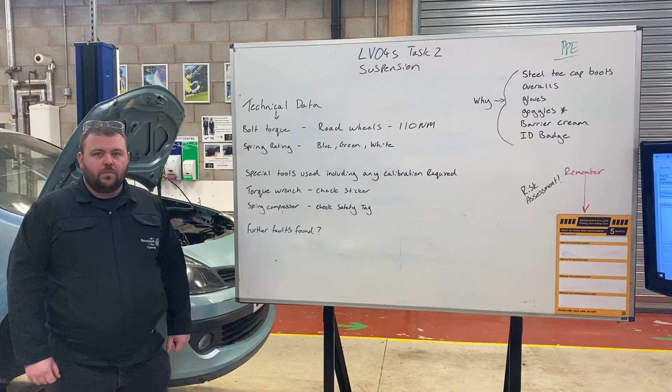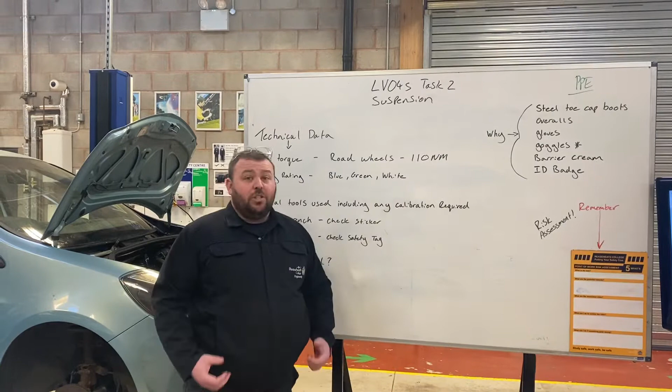So in this task, I'm going to be giving you a refresher and a reminder of the task we completed, which was LV04 task 2, your suspension task. This task is a dual task with two parts: we're going to remove and refit a suspension strut from a vehicle, and then remove and refit the suspension coil spring from the strut.

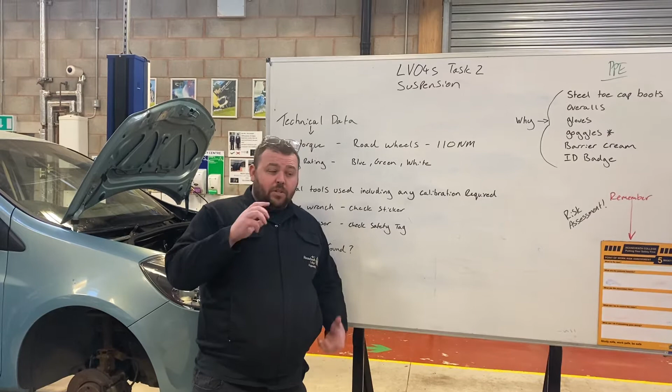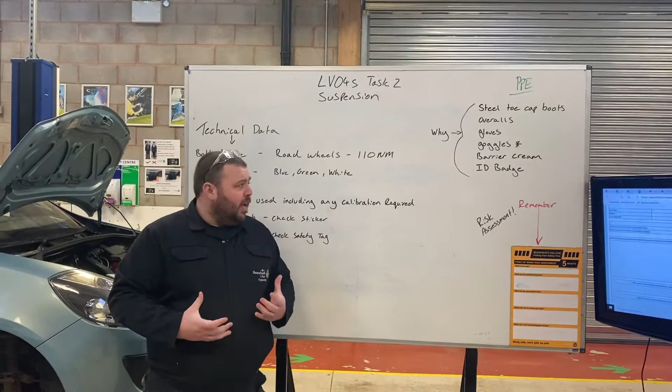So where do we start? Let's have a look at the board. As always, we start our practical lessons with a practical risk assessment. Normally we do that by completing our 5 whats board, but as I'm demonstrating this task, I'm going to be doing our risk assessment as we go through it.

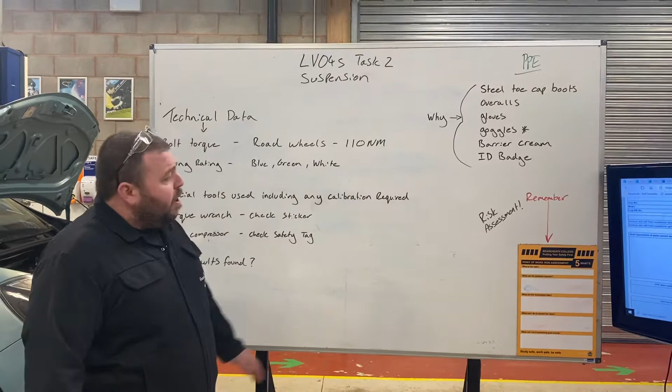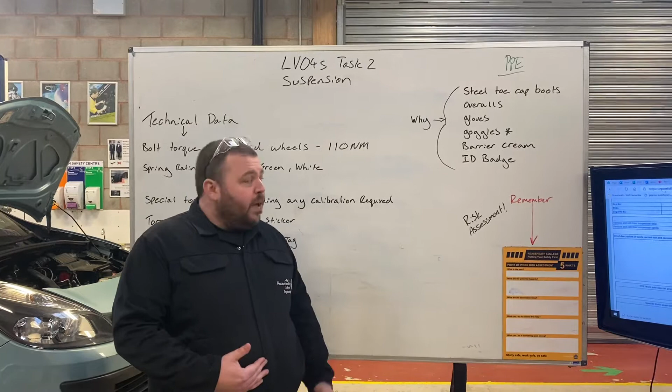After we do our risk assessments in the morning to make sure our environment is safe, we move on to our PPE list. We only wear PPE relevant to the task we're doing. In this particular task, I'm going to be wearing my steel toe cap boots, overalls, gloves, goggles, barrier cream, and an ID badge.

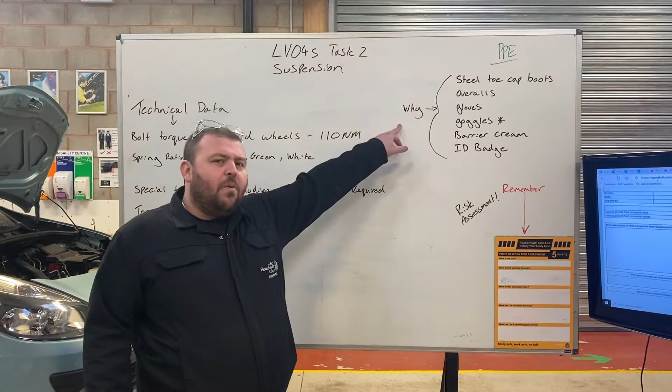I've put there why do I wear it, because on our task sheet it says PPE worn and special precautions taken. So there's a reason why I'm wearing this PPE, and I need you to tell me why it would be relevant to wear each part of it.

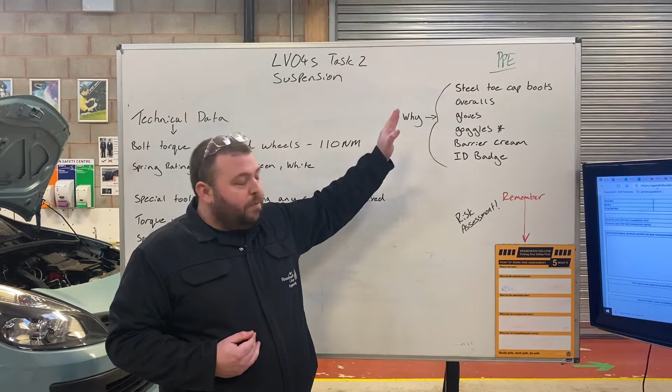Let's have a look then. Let's go over to the task sheet. If we go to our IMI ePortfolio task sheet, here we are - this is exactly how you see it. As always, we start off our task sheet with our vehicle information: registration number, approximate year, make, model, and VIN number.

We then move on to the customer request, which on this particular task, as I said, is a dual task: remove and refit a front suspension strut, remove and refit a suspension spring. Then we're going to complete a brief description of the work carried out.

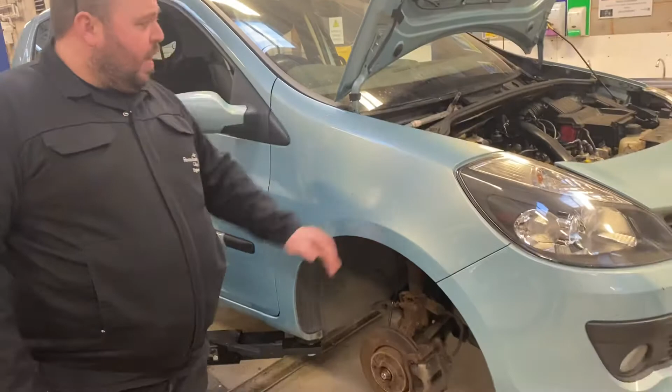Let's have a look now at the vehicle. The vehicle I've chosen for today is our Renault Clio in the workshop. The first part of the task is to remove the suspension strut.

In order to do that, we would always start our strip down at the bottom end of the vehicle. As you can see, for ease of time, I've already taken our wheel off, so let's have a look in our wheel arch. We've got multiple components here that we're going to have to remove.

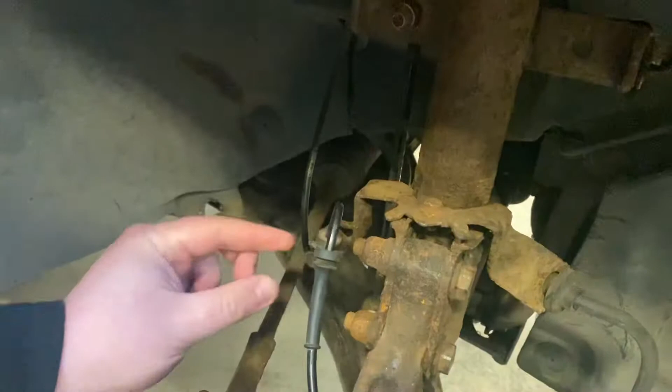I would start by disconnecting anything that could break, such as my ABS wire, and remove that out of the way. I would then move on to something like my suspension drop link, which is here.

There's 2 bolts, so on this particular one I would use an Allen key and either a Swan neck spanner or a socket to remove them. Then my caliper brake hose, which would leave me with my MacPherson strut mounting bolts. On this particular vehicle, that's a double 17mm headed bolt.

As you can see, with rust - so on further faults found, we've got rusty thread, so we might need to wire brush, we might need to use some WD-40. We would then remove our 2 pinch bolts on our strut.

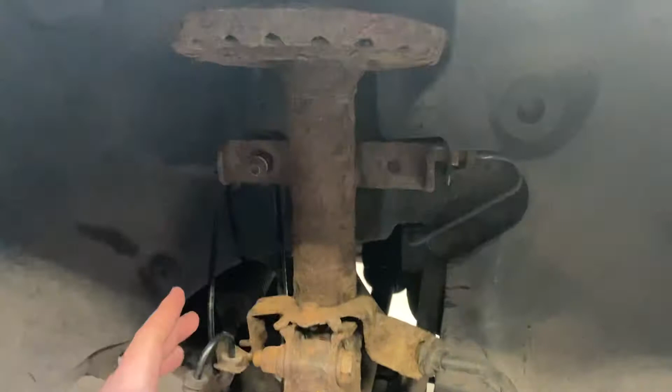Once that's removed, we then need to look at the top of the vehicle. If we look inside our strut top housing, we've got our strut top mounting.

Now we've got 4 bolts here to consider, right? We've got 3 on the outside and 1 in the middle. At this point I've got to stress to you, we would never ever remove that middle bolt without having our suspension spring clamped up.

So we would now look at removing any dirt or debris around here. As you can see, we've got leaves, we've got all sorts going on inside there. One thing you may come across at certain times of the year is maybe something like an angry wasp, so we need to make sure we're considering that, and again that needs to be put into our PPE list.

I'm going to remove my 3 outer bolts to make this vehicle safe to work on. Once I remove those 3 bolts, that will allow me to remove my suspension strut. Now the suspension strut is off the vehicle, we'll then move over to our spring compressor.

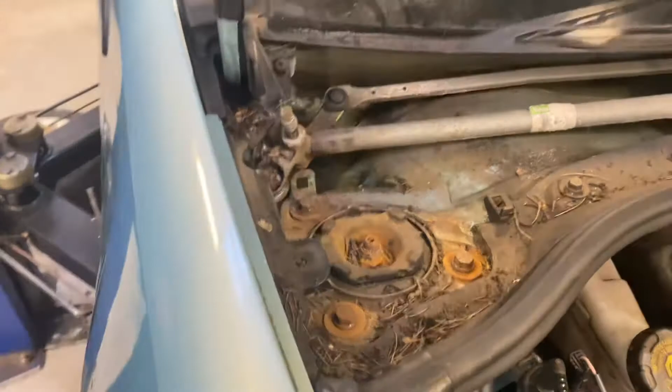Okay, so now I'm actually physically going to be working on a vehicle, so one thing I need to consider now is safety as always. So this is the part where my safety glasses are now down.

Okay, suspension spring compressor. This is pneumatics, it's air operated and it's hydraulic. So before we work on any type of equipment or machinery like this, we would always carry out our visual inspection on the hydraulic systems or the airline. Now I've done that and I'm happy with the condition of this.

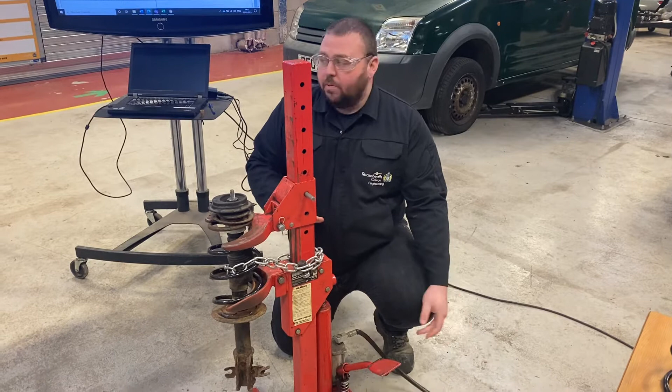Now, because this is a hydraulic system, this is safety checked. So again, on our special tools used and any special precautions taken, we would always double check that this is safety checked, okay? Not only is my compressor safety checked, but my chain is as well and it's load rated.

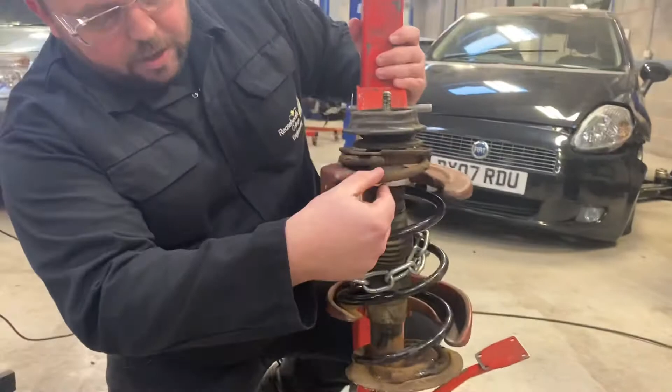Okay, so struts off the car now, it's into our compressor. Now this is a very, very crucial part of the task because we need to now make sure that we've got our spring clamped inside the wells of our clamp.

Once we've done that, we put a chain around it. So worst case, if the spring snapped when we compressed it, the chain would catch that for us. Some garages and different variations of this would possibly have a cage around it. So once we've got it in and we're happy and it's safe and secure, we would then compress that spring.

Once we compress that spring, we can then, and then only, remove our top mounting bolt, okay, or nut. So in this particular case, we've got a big nut on the top. Once we remove that, we can then take the strut top mounting off, release the pressure from our spring, and then remove our spring and shock absorber assembly.

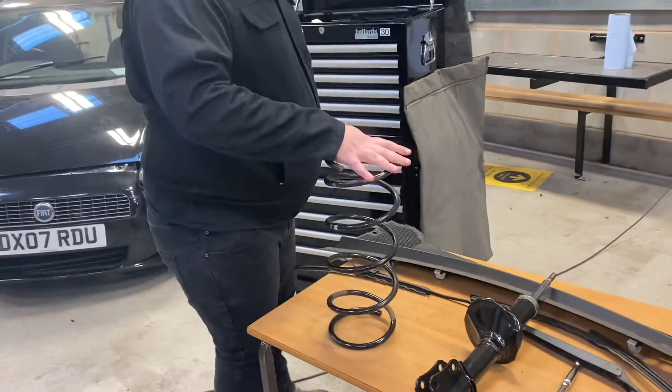Okay, so let's move over to the table and have a look at what we've got. So we've actually got our spring off the vehicle here now. In order for us to get to that strut top mounting, we have to take off what's known as the scuttle panel, and our wiper arms, to get access to the strut top. Okay, so here's my spring as I've got it off.

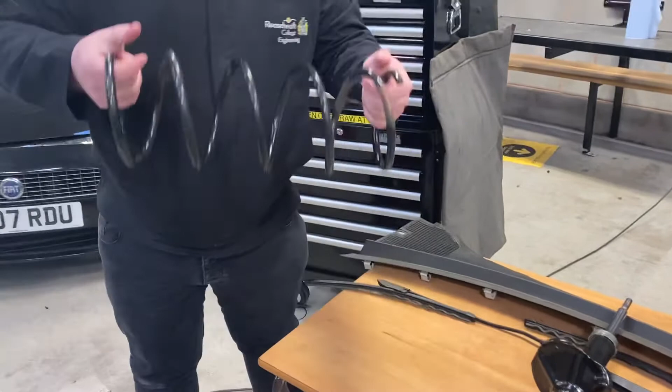So what do we do on a spring when we take it off? We check its overall condition. We check the ends and make sure we've got no cracks, no splits, because that's common where the springs snap. Now, part of our technical data is asking us for our spring load rating.

Now, it's very hard to find that information normally. Certainly unavailable on Autodata, okay? So on this particular task, we're going to list this as having a green, white, and blue dot. Okay, so that's what we're going to add in our technical data.

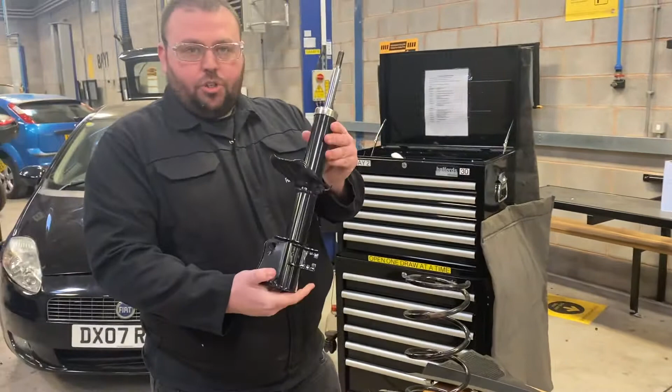As for our strut, the checks we would do are oil leaks. We would check the general condition of the damper, make sure there's no cross threading, and we haven't got any leaks on the hydraulic side, and just general condition. That's a brand new shocker, that is, so it's really nice.

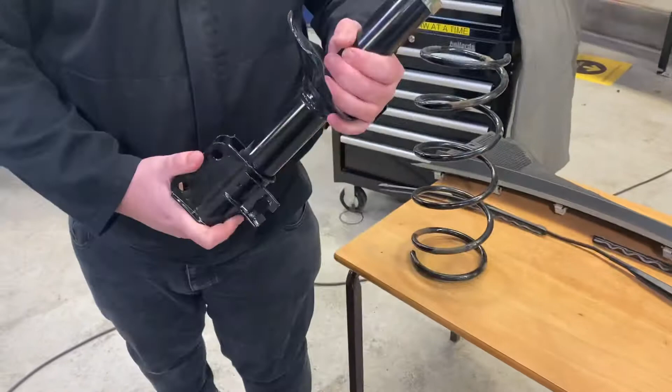Okay, so once we've done that and it all goes back together, we go back to the vehicle. But when we go back to the vehicle, there's a few things that we have to consider when we put it back together that would be different from taking it apart. And that mainly is our torquing, okay? So we undo our bolts with our sockets and ratchets, and we put them back together using a torque wrench to make sure they're tight into manufacturer's specification.

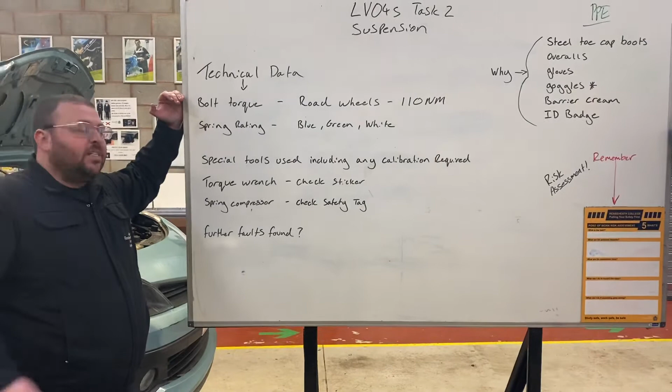Okay, so if we look at our board and our technical data, the technical data your task sheet is asking you for is bolt torque. So on this particular vehicle, we're going to use our road wheels, which is 110 Newton meters. The spring rating, as mentioned before, is blue, green and white.

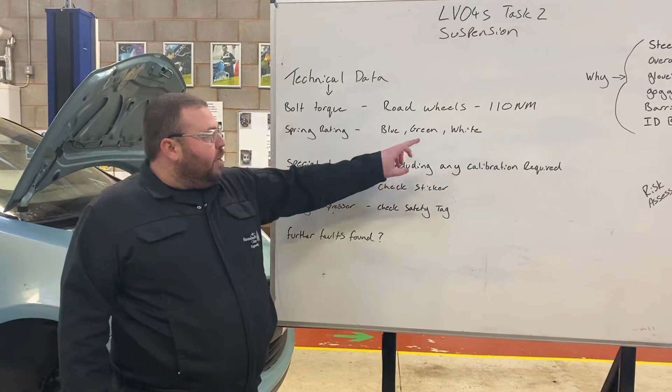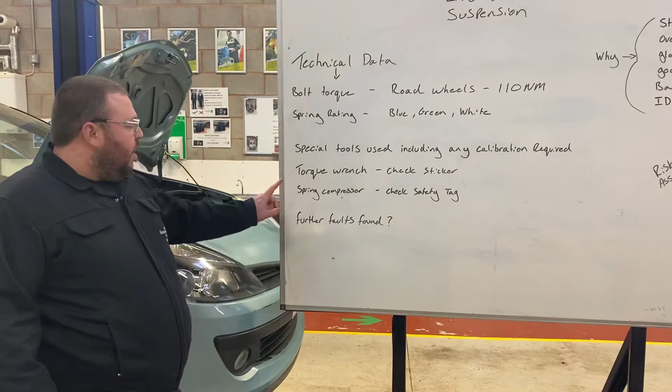The special tools used, including any calibration required on this job, was a torque wrench, and I checked the calibration sticker before I used it. And my spring compressor, I checked the safety tag on it.

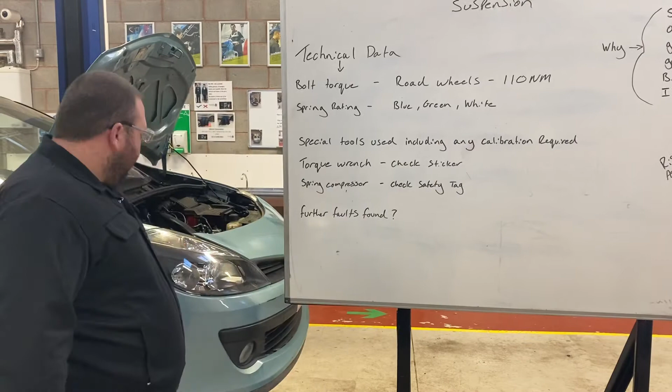Okay, and the final would be our further faults found. Now we can always find things that are wrong with these, maybe a rusty spring, shock absorber, or any issues that we might find along the way with the vehicle itself. Maybe broken ABS wires, that type of thing. So I really want to see that in the further faults found.

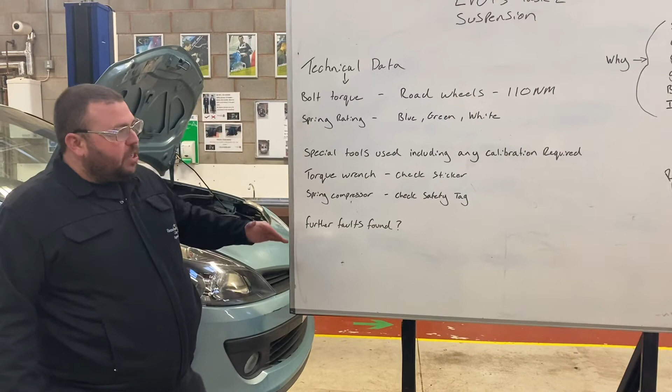Okay, so once we've completed our task sheet, again, brief description of the work carried out, and then we would submit that to the assessor that you did the task with. Okay, I do hope that helps you. Thank you very much.